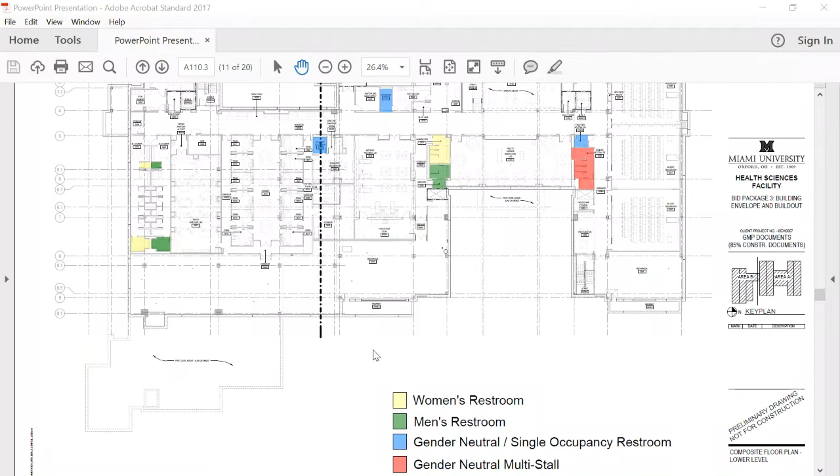See, maybe it's better to hit the next floor then. I'm not sure what's the best floor to do it. So we're trying to understand a little bit here.

Now I'm stuck. Okay, is the unisex toilet rooms that you're providing, there are restrooms that you have that are defined for use by both sexes and also unisex. So explain how that works and how that meets the intent of the forthcoming code section, which may or may not be adopted by Ohio.

Sure. So in the yellow identified in the center of the plan, and the green are the dedicated bisex restrooms. So we have a women's restroom and a men's restroom, in the building that stacks all the way through the building. The men and women, using those terms as definitions of sex, do not share a restroom. Those are separate facilities - a female restroom in yellow and a male restroom in green, and would be designated and signed as independent bisex restrooms. Those are two separate spaces.

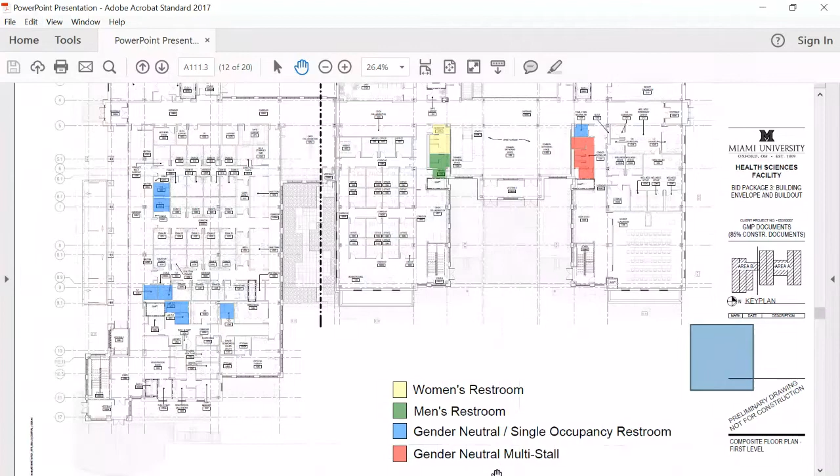Okay, thanks. Brad, any questions of Mr. Lau? Did we lose Brad? He's muted. Yeah, sorry, they said there was some noise going on. I didn't want it to be me.

The pink area, the red area - so I guess that one stall that has the sink in it, that's for handicap, I'm assuming. Is that right? Yes, that is a handicap accessible restroom. We included a sink in there for extra added convenience for that particular stall. But the other three stalls in there share the lavatory. That is correct.

Okay. It seems that, why didn't you just put 3 more of the gender neutral singles instead of those? It becomes a space issue when they become singles and are gender neutral. They require more floor space and ADA clearances, and each one of those single-use restrooms has to be ADA compliant. This in a multi-stall situation would meet the ADA compliance percentage in a more space efficient standpoint. Space efficiency was a conscious effort for this particular building to make sure it meets the cost parameters that we've been given.

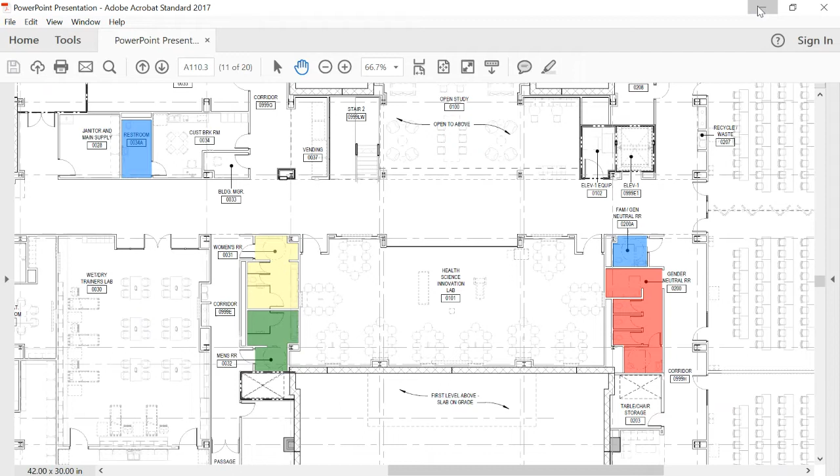Anything further, Paul? No further questions, Mr. Chair. Mr. Monroe, does that prompt the need for you to inquire of Jeff? No, thank you.

Okay, Mr. Chair, I do have a question for Jeff. So, Jeff, if I'm understanding you correctly, your position is against the granting of the variance, correct? Yes, that's what our Mr. Monroe stated as well. Thank you.

I have a question for the appellant. I'm not sure which one was talking, whether it was Andrew, but exactly what is the hardship that the university is claiming on this?

So I will start and have Robert add commentary. I don't believe it's a hardship. It is meeting the intent of the diversity inclusion and the nature of the facility to meet the needs of Miami University. It is our understanding that this has been approved in another facility in the state of Ohio, but that may not be the case depending upon the court case. I can give you the appellate number, but the hardship is really just there's not a monetary hardship. It is really just providing the correct type of facility for the stated need of the Miami University community.

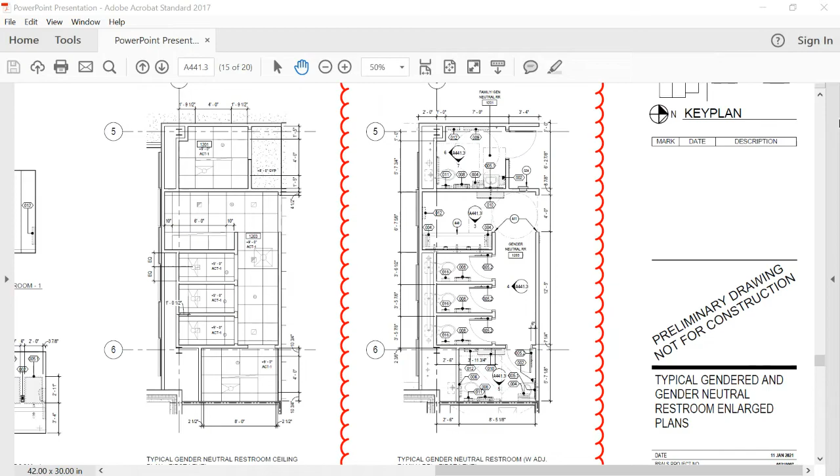Are you ready? Yes, Mr. Chair. Okay, let's go back on the record, Nick. All right, I'm going to throw this up on the screen so hopefully everybody can see it. There we go. Real quickly, Nick, I don't see Nick on my screen. You're still connected? Hi, yes, I'm here. Great, thank you.

This variance is conditioned on the following. Number one, identification and directional signage shall be provided at each restroom to the satisfaction of the building official. Number two, this variance is granted based on the use, construction, occupant load, project area, and level of activity identified on the approved construction documents, including the maintenance of all building systems and any conditions required herein. That's it.

So Mr. Lau, Mr. Bell, are those conditions satisfactory? Yes, they are. Yes. And Mr. Eaton? Yes sir, thank you. Okay, I would entertain a motion.

As we discussed, the intent of the identification and directional signage is so that people feel comfortable knowing that there is a restroom facility that is right for them and know how to get to them. Agreed, as clear as I can say that, so when you and Mr. Eaton work through the details of what that signage says and what needs to be on it, I believe that's the intent of that condition. Yeah, understood, thank you.

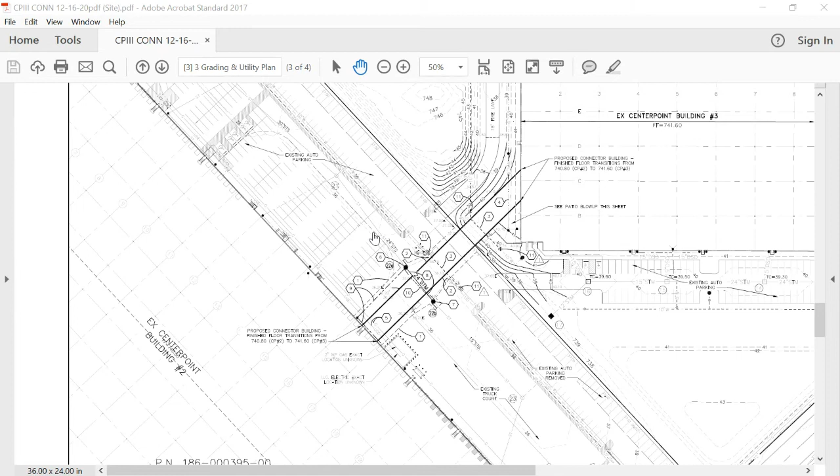Yes, Mr. Chair. And Brad? Yeah, sounds like they have satisfied any concerns from the fire department or the building official, and they are in support of this variance. So I would be supportive of it as well.

So Paul, what do you have to do? Do you have to tweak what was prepared last hearing to put back on the screen to walk through? That is already done, Mr. Chair. If you don't mind, I will put them up on the screen and read those conditions.

Reason why I asked about the openings next door, part of the conditions you will hear have to do with making sure any openings within 10 feet are enclosed. I know there's no dock doors, but there is a window, so I think if we leave that in there as written, it will be sufficient. But they are up on the screen for those of you listening on the phone. I just gave you another 10 or 15 seconds, hopefully that feed has caught up with you, but I will read through them as well.

For item number 1 on the adjudication order, variance is conditioned on the following. Number 1, the 8-inch water line beneath the connector structure shall be replaced with a concrete encased split connector to the satisfaction of the building official. Number 2, the continuous fire loop around each building shall be maintained. Number 3, sanitary piping beneath the connector structure shall be of an approved material to the satisfaction of the building official.

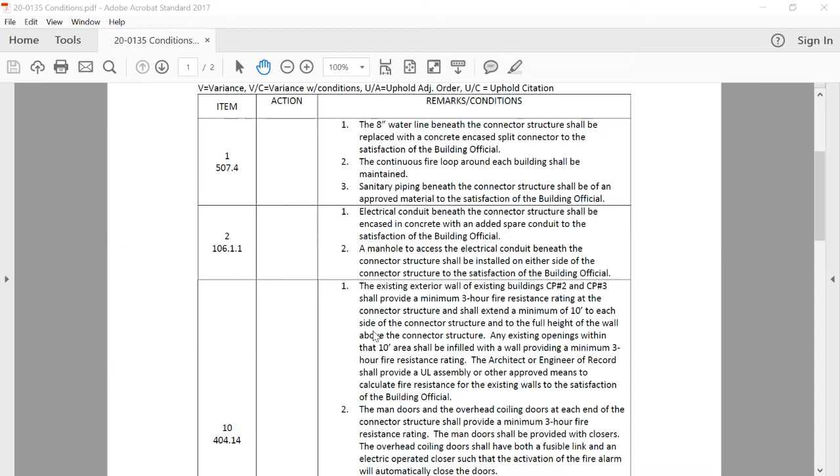For item number 10 of the adjudication order, variance is conditioned on the following. Number 1, I want to make sure I'm in the right spot here. The existing exterior wall of the existing buildings, CP number 2 and CP number 3, referencing Centerpoint, shall provide a minimum 3-hour fire resistance rating at the connector structure and shall extend a minimum of 10 feet to each side of the connector structure and to the full height of the wall above the connector structure. Any existing openings within that 10 feet area shall be infilled with a wall providing a minimum 3-hour fire resistance rating. The architect or engineer of record shall provide a UL assembly or other approved means to calculate fire resistance for the existing walls to the satisfaction of the building official.

Number 2, the man doors and the overhead coiling doors at each end of the connector structure shall provide a minimum 3-hour fire resistance rating. The man doors shall be provided with closers. The overhead coiling doors shall have both a fusible link and an electric operated closer such that the activation of the fire alarm will automatically close the doors.

Number 3, the fire alarm system within the connector structure shall be interconnected into the fire alarm of both the CP2 and CP3 buildings, such that the activation of the fire alarm in either building shall activate the fire alarm in the connector structure. The fire alarm system in the connector structure will be operated and maintained as part of the automatic sprinkler system of the CP number 3 building.

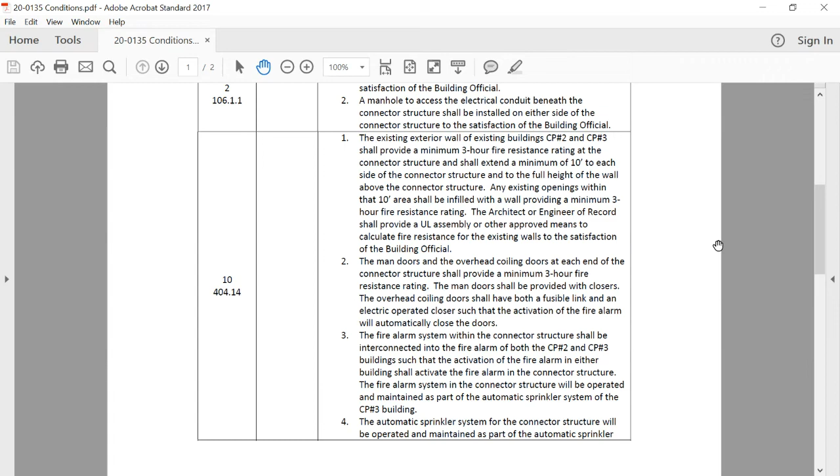Number 4, the automatic sprinkler system for the connector structure will be operated and maintained as part of the automatic sprinkler system of the CP3 building. Number 5, the means of egress illumination, egress lighting, and exit signage for the connector structure will be operated and maintained as part of the system of the CP3 building.

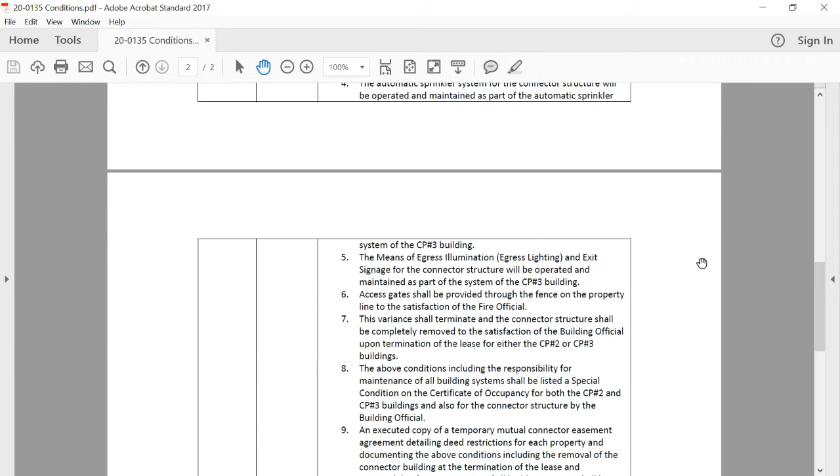Number 6, access gates shall be provided through the fence on the property line to the satisfaction of the fire official. Number 7, this variance shall terminate and the connector structure shall be completely removed to the satisfaction of the building official upon termination of the lease for either the CP2 or CP3 buildings.

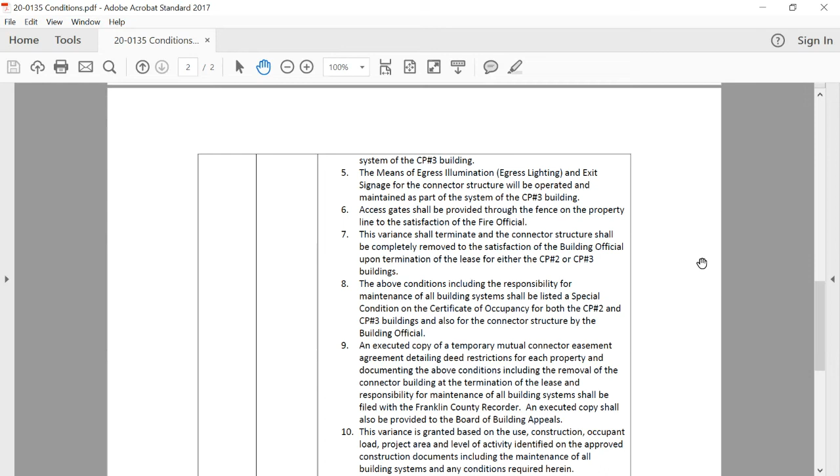Number 8: the above conditions, including responsibility for maintenance of all building systems, shall be listed as a special condition on the certificate of occupancy for both the CP2 and CP3 buildings, and also for the connector structure, by the building official. Number 9: an executed copy of a temporary mutual connector easement agreement detailing deed restrictions for each property and documenting the above conditions, including removal of the connector building at termination of the lease and responsibility for maintenance of all building systems, shall be filed with the Franklin County Recorder. An executed copy shall also be provided to the Board of Building Appeals.

Number 10: this variance is granted based on the use, construction, occupant load, project area, and level of activity identified on the approved construction documents, including maintenance of all building systems and any conditions required herein. And finally, number 11: the chief building official shall forward a copy of any certificate of occupancy to the fire department having either emergency response or fire prevention responsibility.

Okay, I'll direct this to Mr. Wyatt or any of his colleagues. Are those conditions acceptable? Do you have any questions? Do you need clarification on any of those items?